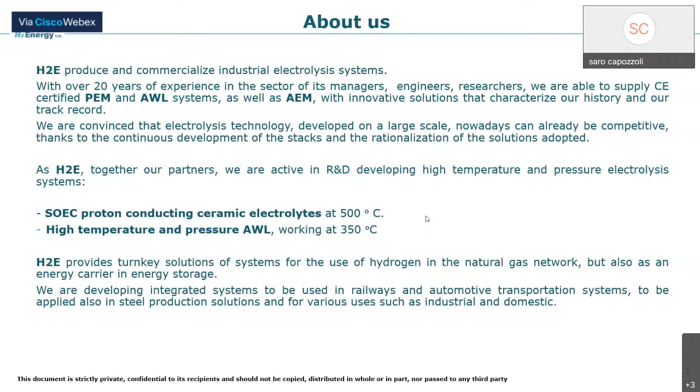Sorry. In this technology, in this field, Europe has a limited capacity at this moment of production of this kind of equipment. We are speaking about a capacity last year of 70 megawatt, but with a request in the market of more than 40 gigawatt. So there is a lot to do, and we are ready to answer the request of the market.

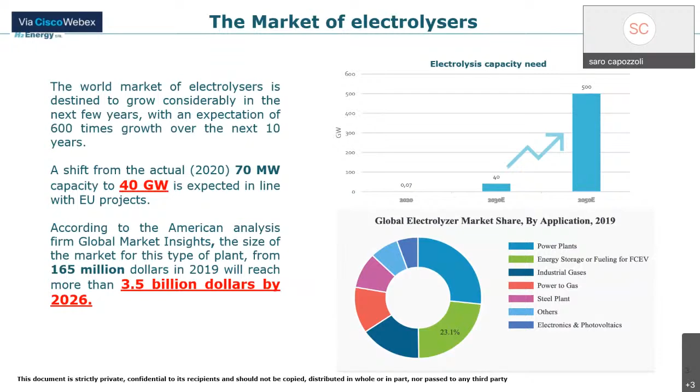The technologies available at this moment are, as I told you before, alkaline, the oldest technology, where we work with a 30% solution of alkaline medium, and this is a technology that is going to be abandoned in the near future. The technology that is more popular is the protonic exchange membrane, which uses expensive and not so easy to find catalysts like platinum, iridium, ruthenium. But this is the state-of-the-art and most flexible plant.

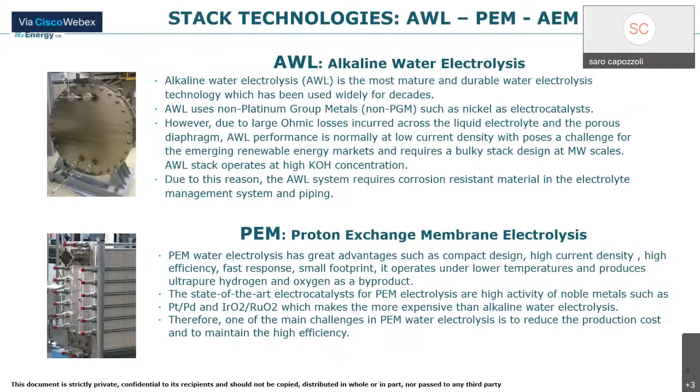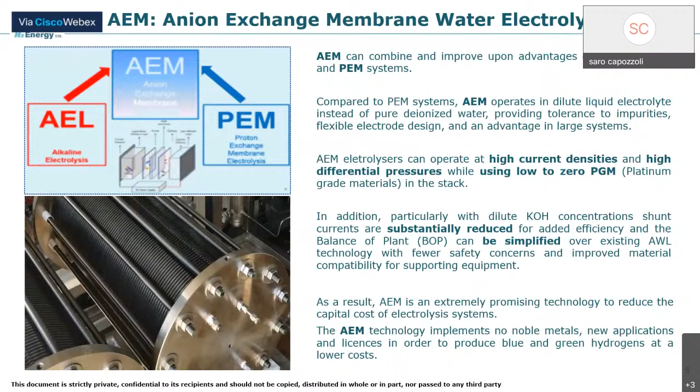Our company at this moment is developing the technology of anionic exchange membrane, which normally is produced at small capacity, but we are able to produce even a single stack of 1 megawatt, and we are entering the megawatt scale next year. This will be a game changer in the industry. In fact, we have simplified the technology. The layout of the plant, the balance of plant, is more simple. We optimized the system and we are in the position to produce these systems at a large scale starting from next year. This is something new in the market at a large scale.

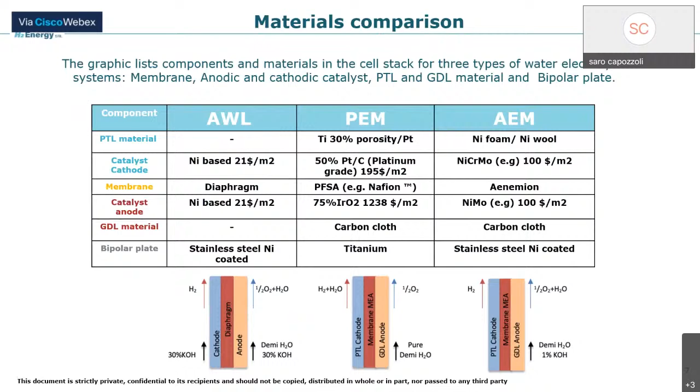Actually, the differences are mainly in the membrane and in the working conditions. Since our simplification of the system, as you can see comparing the two systems, the PEM and the anion exchange membrane, we are in the position to offer plants that can cost up to 50% cheaper than PEM or alkaline systems. At this moment, we can say that the technologies are mature, for the PEM system, and if these products are used more widely, it will be easy also to increase the capability and optimize the cost.

Coming back to our topic, we see a big development in the future also for high temperature systems using the off gas of a factory like a steel factory, or cogeneration plants, thanks to the use of the ceramic stack. This will allow a saving of energy, since the energy to split the water molecule into hydrogen and oxygen will be less intensive.

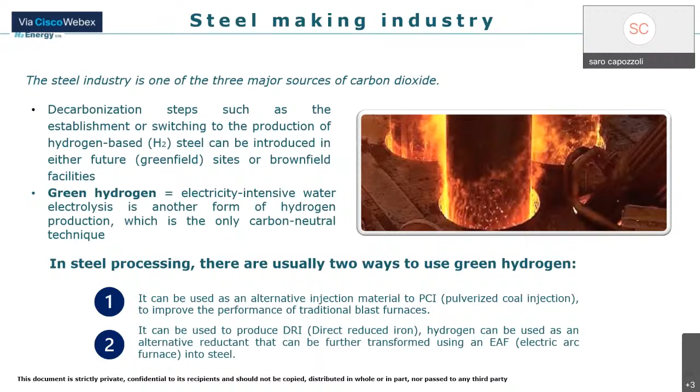For the decarbonization with hydrogen, we are touching different scenarios, different situations. It is sure that in the future, the use of hydrogen produced by our machinery, with our machines, will be used more and more, even in power generation. But we don't envisage the use of fuel cell systems, because this will be quite expensive.

Hydrogen can be produced by excess power coming from renewable energy systems, like wind turbines, also from solar panels, solar plants, and so on. This excess energy can be stored in hydrogen or even ammonia, but mainly in hydrogen, and used in different scenarios. Used as a co-fuel with methane to fuel the energy plant or steel plant, but also directly we can produce energy thanks to the new technology that actually is already applied in many different plants in Europe.

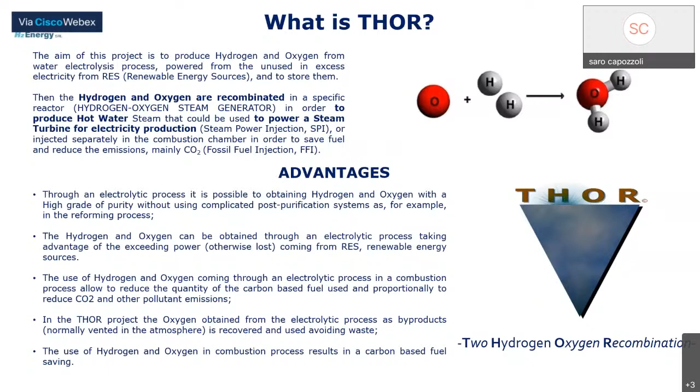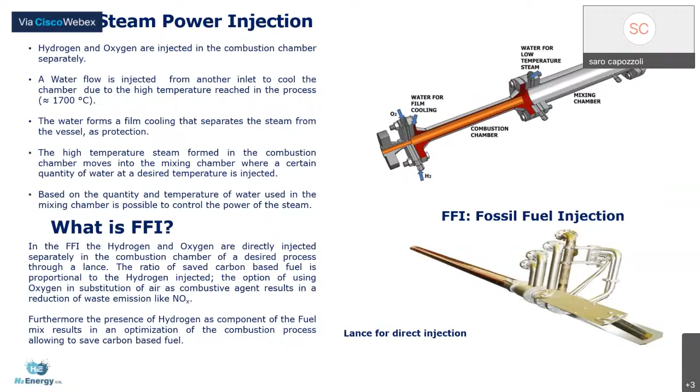We can call it hydrogen-oxygen recombination. It uses the hydrogen and the oxygen also produced by the electrolysis system in order to produce high pressure steam to be fired inside a steam turbine. This is a new system that we are now step by step thinking to apply also in Europe, so that we can utilize the excess hydrogen stored from renewable energy, and also, very important, the oxygen that normally in the hydrogen industry is vented to the atmosphere. Here we can use it as an agent to burn and produce high pressure steam inside the steam turbine. So we have different topics.

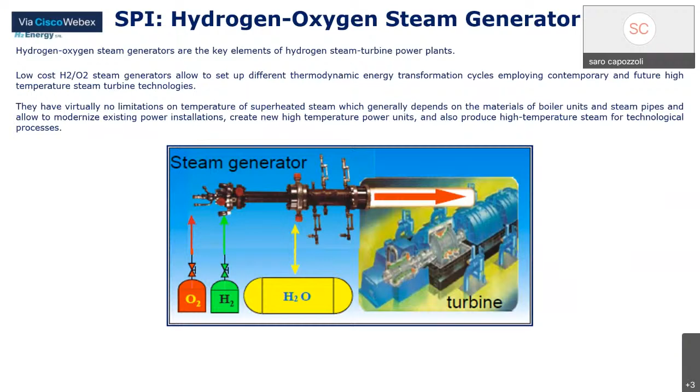So we can say that starting from electrolysis systems, it is possible to enter into different fields and to find optimization together, because we need to share information, to share technology in order to reach as soon as possible the 2050 target, no carbon use. Because here in Europe it is mandatory. Now it is by law. We need to reach by 2050 no carbon use, and this is a game changer. The system that I'm speaking about is indicated here. I will be available in the near future to explain how it works.

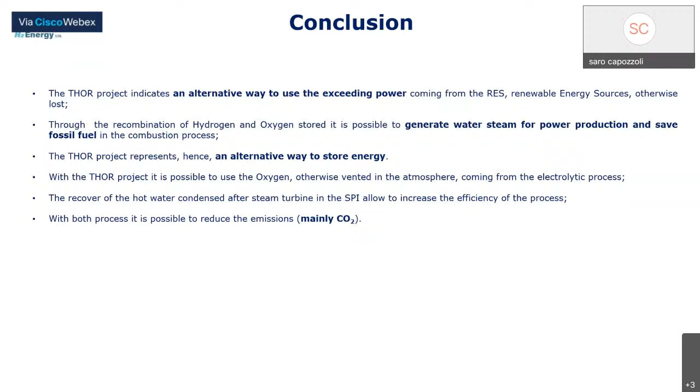We started from our machine to store hydrogen, and from here we can help to think about the plant with you. Of course, not with us alone, because we are just a producer of hydrogen systems, but with our partners that can help you to reduce CO2 emissions. According to our view, it is now necessary to combine the use of carbon like methane or natural gas, even coal, together with hydrogen, and step by step in the future reach 100% hydrogen.

The applications are many, as you can see, and we are starting with the steel factory, with buses, with railway, and also in ports at this moment. But we don't see at this moment an immediate use of hydrogen in transportation for cars, for example, because the system requires some time to switch from combustion engines to electric and then to hydrogen.

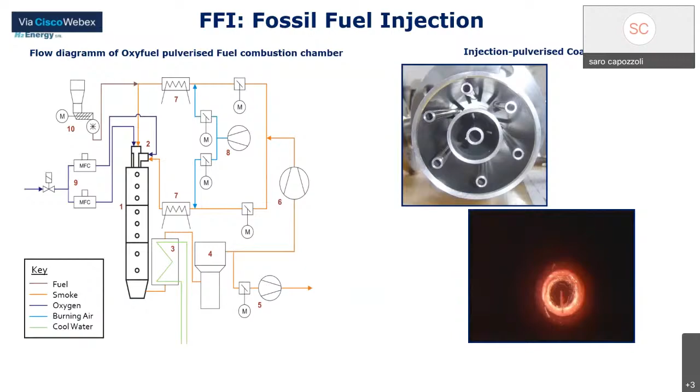So, could you tell me what could be the cost implications for setting up a hydrogen plant? Could you give me a specific number in terms of dollars per ton, meter cube, something like that? Okay. For producing hydrogen with our systems, it depends on the cost of the energy. That is simple. The cost depends very much on this.

At this moment, with the actual cost of renewable energy in Europe and Italy, considering also the cost of the machine, the capex, we are between 2.5 to 3 euro per kilo of hydrogen. But if you start to recover oxygen, and also recover the hot water, the condensed water that is at 60, 70 degrees, you start to recover the system.

You can optimize. In the future, I think not too far, in the next 2 or 3 years, this figure can be lower, especially if we can combine more machines together and optimize the system. For example, now we are studying with a big petrochemical company in Italy a system for 100 megawatts, and we will study all the optimization in order to reduce the cost and optimize also the flow of the heat and the recovery of the exceeding heat.

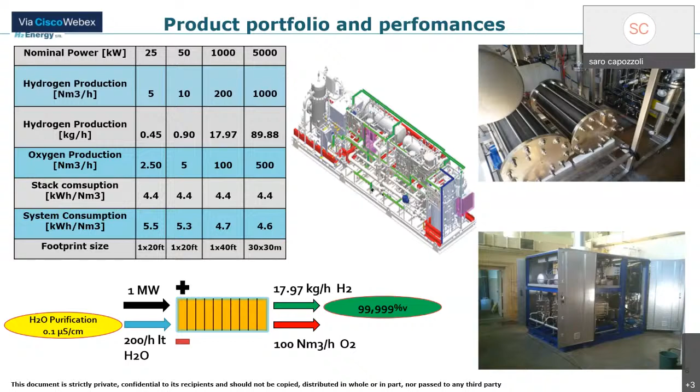So I tell you, if we receive an inquiry for 1 megawatt, it could be not so competitive. I tell you very clearly. But with the bigger plant, we have a problem. A very big plant. When I hear of the gigawatt plant, the problem is the technology because it needs a lot of space. Our aim is to reduce the size of the plant and also, for example, the change we have for our system, from PEM to AEM, the next future technology. Already we cut the cost of the platinum, iridium, the noble materials. This is a very important change.

Okay, thank you, Mr. Saro. Another thing from my side was that what we are looking at in India is that sectors like iron and steel, fertilizers, would be the first ones to adopt hydrogen as one of the technologies towards low carbon transition. Where do you think the power sector stands when it comes to power generation through hydrogen? I hope you could understand my question.

My background is I'm a chemical engineer and I was a designer of urea ammonia plants. I know your country very well. I was working many years ago at Snamprogetti, which designed and built a lot of plants in your country, so I know all the problematics very well. I envisage that there will be possible production of ammonia using hydrogen, and this can be a first step. This will be a very big change, to produce green urea for agricultural use.